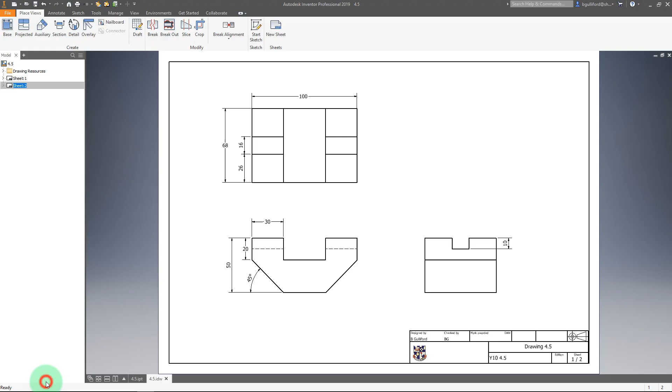So to get started, you need to just go to the class page and download the Inventor title block, which will come to the downloads. When you click on it, it'll automatically launch by default into Autodesk Inventor. Now this is a different view to what you're probably used to. You're probably more used to this actual part, and that's okay. I'll explain some things as we go along.

Essentially, we've done the tricky bit for you in that we've created a title block, which you can just constantly reuse and adapt as you need, which is great for what we're doing. So let's get started. So just over here, I press this button, which kind of zooms to the whole screen view. And I've already got that 4.5 block open, so I'm going to click on base on the top left corner and just maybe drag that to a better location.

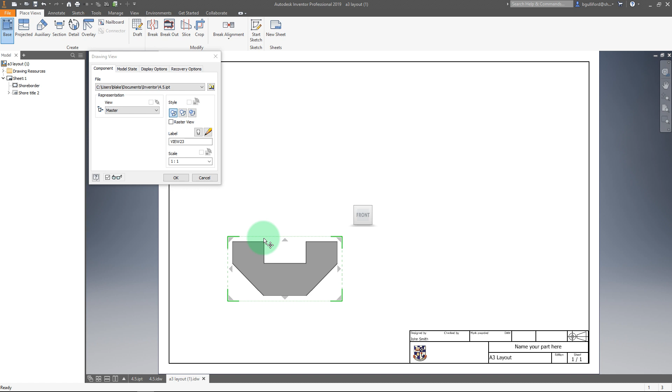So I'm going to be looking at doing the top and the right side views as well. And when I'm happy, I can press OK. That's pretty easy, isn't it? Once you've done the hard work of drawing the model, and hopefully did a decent job of doing the dimensioning of it, it's actually pretty quick and easy to get this final bit together.

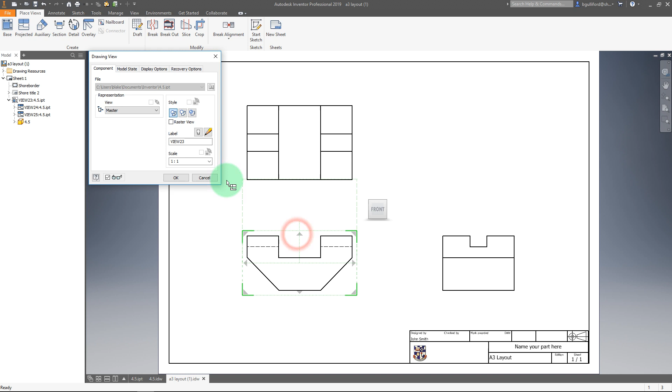Now these are all dynamically linked, which means if I make a change to one, then they all get changed, which is great. So probably just while we're playing with this, if I just double click on this, you can see there's a slight red outline. If I double click here, I can change the scale. I might just see if I can make that maybe 2:1 and see if this is going to be a better use of the page. That's not going to be better. It doesn't quite fit on the page, so I'll undo that.

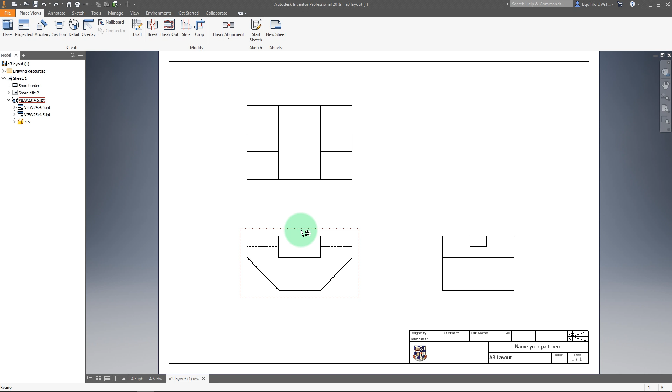So now that I've got my top, front and right side views, I'm going to get some dimensions on. So again, if we've done a good job in the modeling stage, this is pretty quick and painless effort. If I left click on one of the models and right click, I need to go to retrieve model annotations. A whole heap of measurements will come up, which is awesome. Basically, all of the previous hard work that I've put in here has come across, which is great.

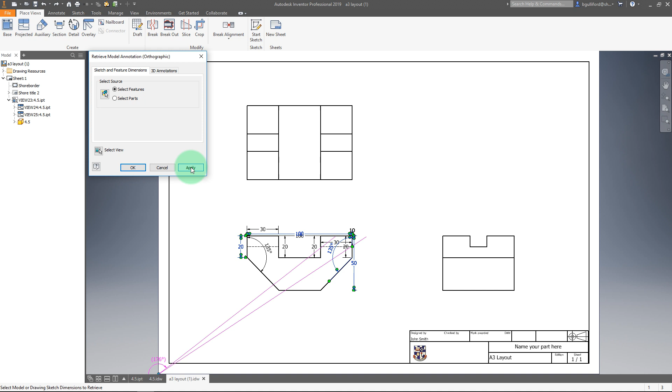And I can now just sort of select the dimensions that I want to keep. And you'll see that they're turning blue. And I'll select what I think I need. Now it's important not to over dimension. And I can also put dimensions on all three views if I need to. So I press OK, and just escape to close that. Great, so I've got some dimensions to start.

This is not everything, but I can now left click and drag a dimension around to reposition it. That would be better over there, but I can make do with that. Measurement of 20, that's good, and that's probably not ideal. I think the drawing actually has it as being a 45-degree angle from the base, which I think I'd rather keep. So let's do the same for this top view.

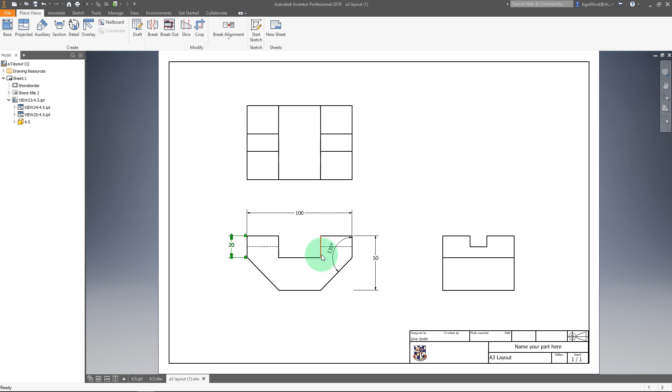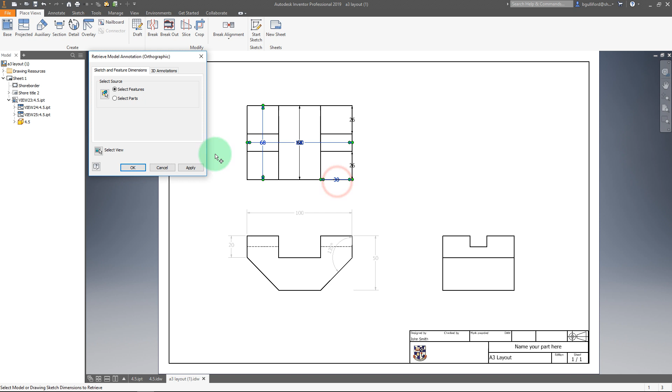Let's see what dimensions we can get without having to do any more work, because it's always advantageous in CAD. That's one of the reasons we want to do CAD. I might take this 100 from there actually. I'll take the overall width, and that 30 might be better suited here as well. Okay, and I'll press apply, and I'll again just escape out of that and drag these up. So that's going to be better.

Ideally, I want to try and avoid having dimensions in this sort of corridor. It just helps with how the model's presented. It really helps the legibility of a drawing if everything's clear. So this dimension here is probably not going to work out. That'll be probably in a bad spot. No, that will work. So just left click and drag to sort of where you want them to be.

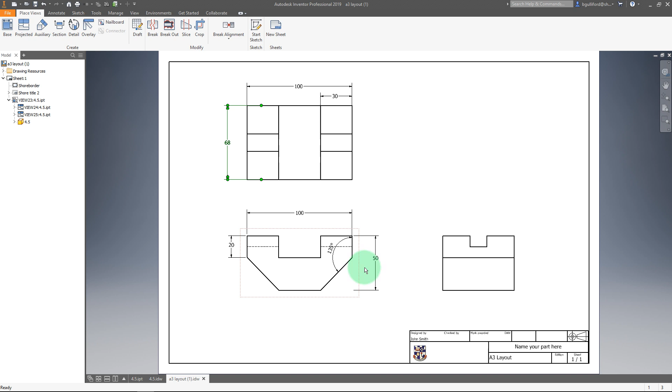Awesome. Now that's not quite fully dimensioned, so I'm probably going to get rid of that dimension actually. I'm not happy with that, and I need to replace this. So the next thing I want to do is, up in the top panel, if I go to annotate and click on dimension, I can now left click on the starting line and on the second line that I want to dimension, and there's my 50.

Okay, I can delete this. You get this pop-up, so you can just press escape out of that whenever you select a dimension. And I'm just going to press the delete key to get rid of that dimension. Next I'm going to try and get that 45-degree line. So hopefully I should be able to select this one angled line and that horizontal line. Let's see, that's coming over. Not quite. I might try selecting it the other way and see if that works.

Angle dimensions can be a little bit tricky sometimes. I'm not sure if you can see, but just to the right of my cursor, it's actually changing shape. So that's saying it's going to be a dimensioned angle. Oh, okay, that was swapping between being a parallel dimension. So this is great. I can select 45 degrees, or I can pan it over to being 135. So obviously I'm after that 45 degree, and I can now just delete that dimension out of the way.

Awesome. That's a duplicate, and I don't want to have any duplicate dimensions. That does not help with the reading of this model. I might put another dimension. So if I press D, that's the shortcut to bring up this dimensioning tool. So I might just bring in that dimension. And ideally I want to have dimensions in line with each other. What I mean by that is that the tails meet up, and that's a convention. Again, it enhances the legibility, because that's the aim of the game with our engineering drawing.

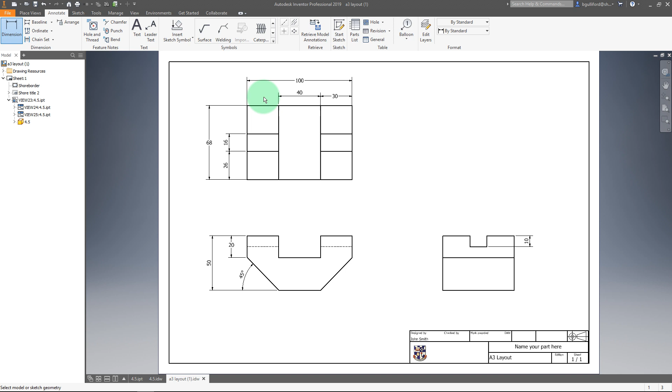Awesome. So this looks like I've got all of the dimensions here. There's no duplicates, which means I've done a pretty good job. If I put another 30 here, that would be over constrained. 100 there is sufficient so that you can apply a bit of maths to find out what that dimension is. So that's awesome. So the next step, I guess, is to focus on filling out this stuff in here. So designed by, no, I'm not John Smith.

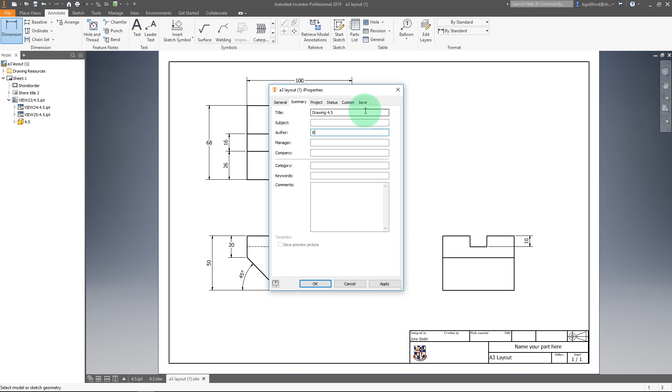So again, Inventor's got a pretty cool way of handling this. If I go to File and scroll down to iProperties, we've got a couple of tabs here that will help us. So Title, and it says name your part here. So I think this is Drawing 4.5, so I'm going to call it Drawing 4.5. Subject doesn't have a spot. Author, I'm B. Gulliford. Awesome, I'll click Apply. And I'm going to come over to Project, whilst I'm here.

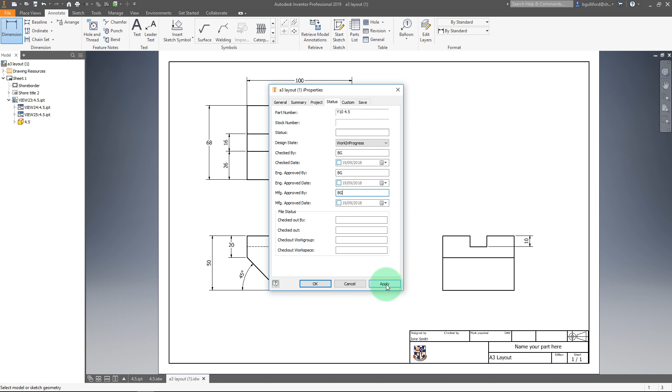And I'm going to change part number, which you'll see is presented down here. I'm going to type year 10 4.5. And again, I'll just fix up designer. I think this is just a duplicated field, unfortunately. Need to get rid of. That looks okay, and I'll click apply. And then lastly, status. Is there anything we need to do here? It'd be good if you could put a checked by as me. So BG, might just put in Eng approved by BG, and MFG approved by BG. So if I click apply and close this, hopefully that should be updated.

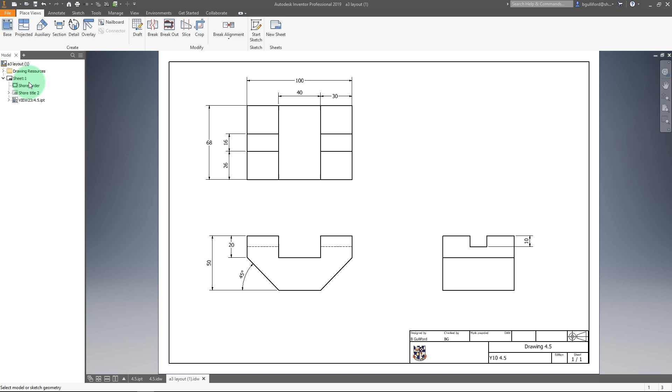Okay, don't worry about the mark awarded, don't worry about the date. We're not doing editions here. We've got the drawing design name quite clearly prominent. I can identify what this project is out of all the different work I'm handed in. So the last thing is this sheet. So again, Inventor's pretty nice for us. If we go back to the Place Views tab in the top left, now that I've got this whole thing, if I was to save this, potentially, just as my name, if I say save as, and I'll save this in my documents and then in my Inventor folder. Hopefully you've already got a project sorted out. I might just call it Year 10 Engineering.

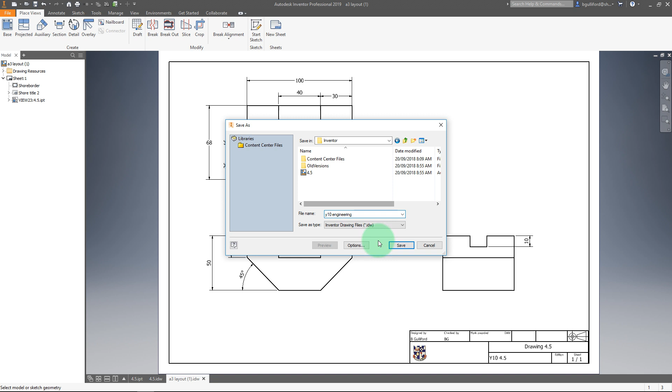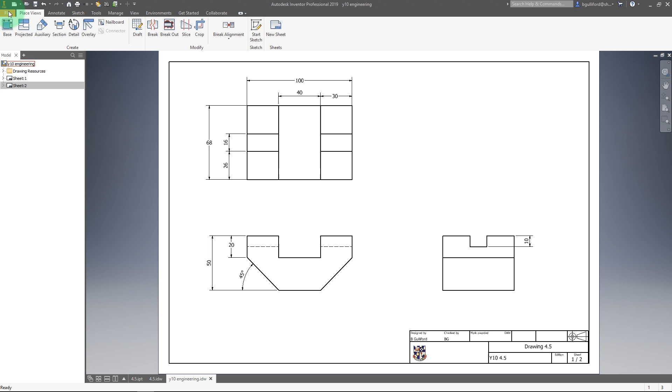Now that I've got this, I can now click on New Sheet, and presto, I can start the process again, and you can see that I can just dynamically change these names, and the sheets are automatically updated. So the last thing to do, I guess, for submission, sorry, I'm just double clicking on the picture here to change back to drawing one, is to go File and Print, and then print it as a PDF in A3. So I don't have any printers installed on this, so hopefully this works.

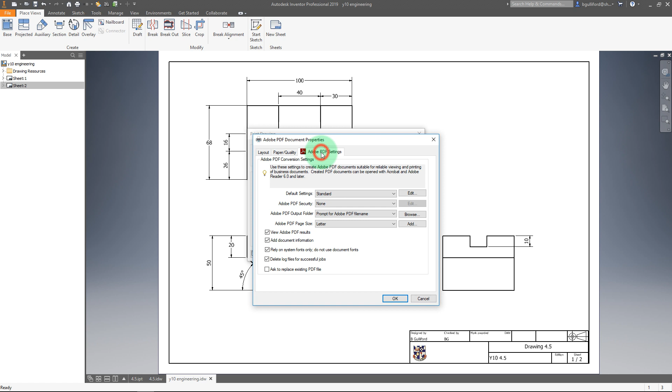Great. So Adobe PDF, go to Properties, and you'll need to say that it's landscape and that it's in A3. So you'll have these properties a little bit more readily available. I unfortunately don't have a printer installed on this laptop, let alone A3. So you need to make sure that it's A3 in the printer settings and landscape.